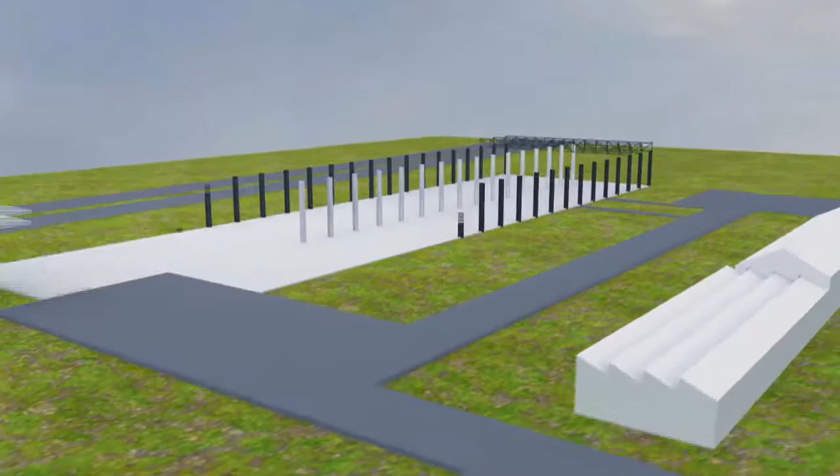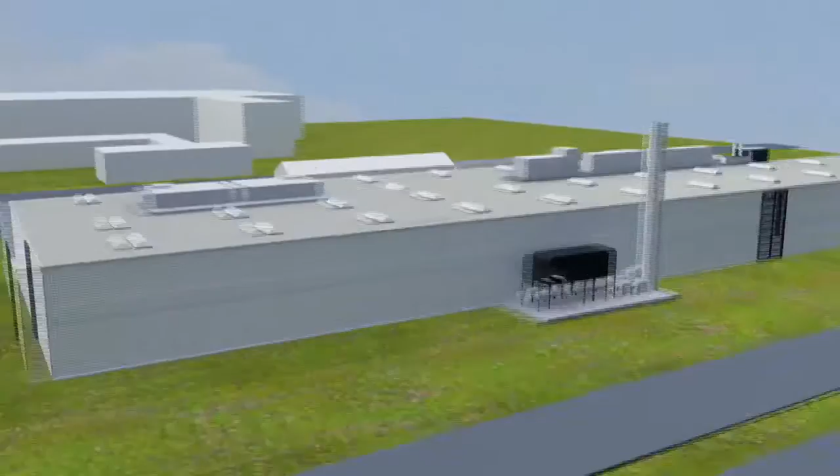SIA Abrasives has opened up its new manufacturing plant for coated abrasives at its headquarters in Frauenfeld. The plant was constructed according to strict ecological criteria. The new abrasives manufacturing plant will enable SIA Abrasives to improve its ability to deliver and increase its flexibility.

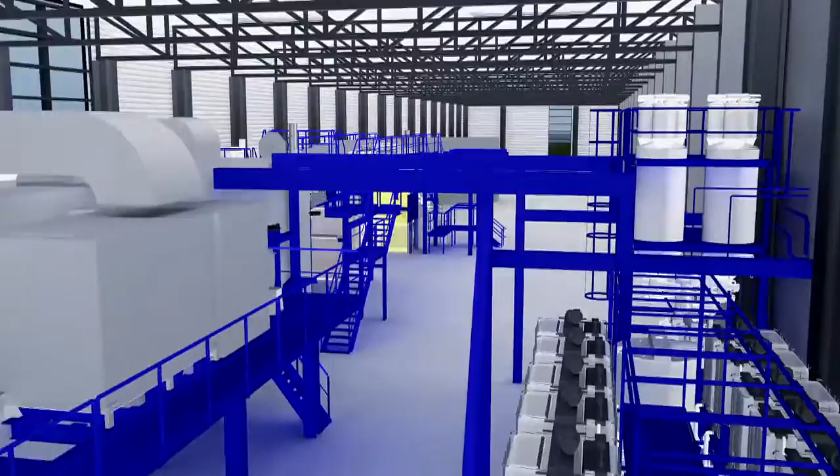More than 1,000 process parameters are incorporated and permanently regulated, which brings the quality to an extremely high level of consistency. It is now possible to manufacture all manners of different sanding products to meet individual requirements, using the latest technical means, depending on the abrasive requirement for a particular surface, such as material removal, finish, or structure.

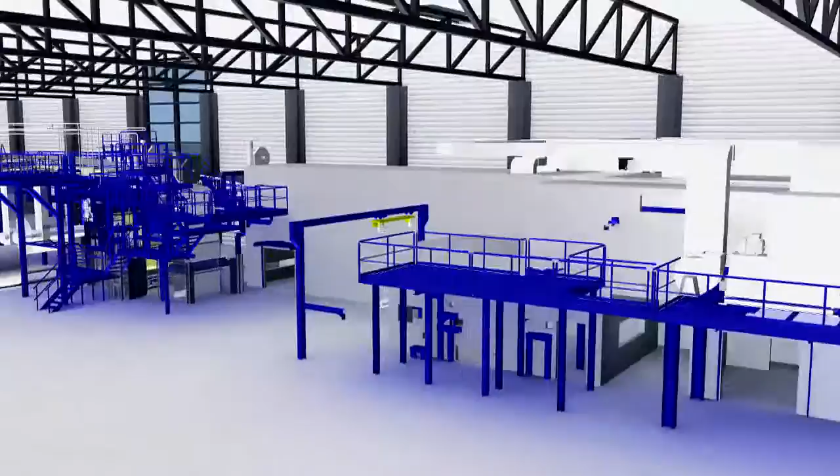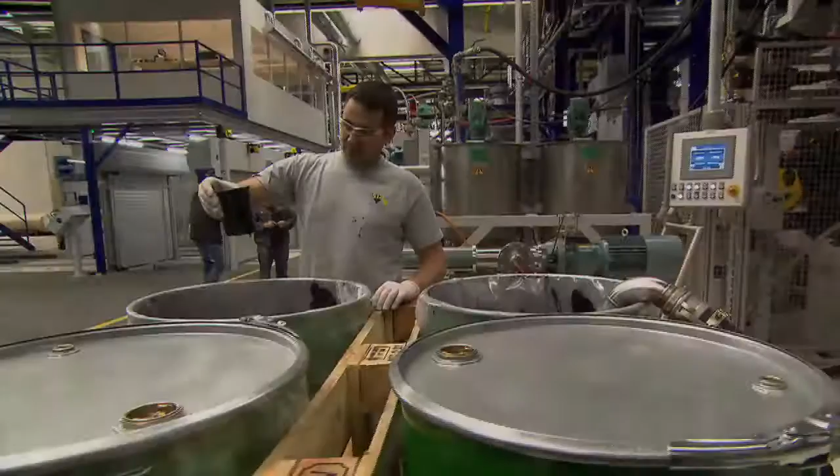Our careful choice of premium materials provides sanding products at the highest level.

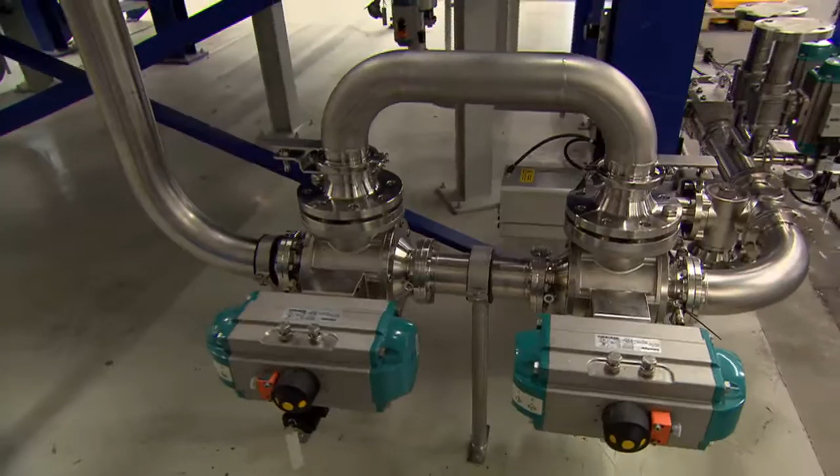Today, SIA Abrasives uses only water-based bonding systems. These are mainly made with phenolic and urea resins, with additives of different dispersions to gauge flexibility to suit the application. The system is fully automatic. The required bonding agent is prepared just in time in the amounts required for each production order, so no excess bonding agent is produced.

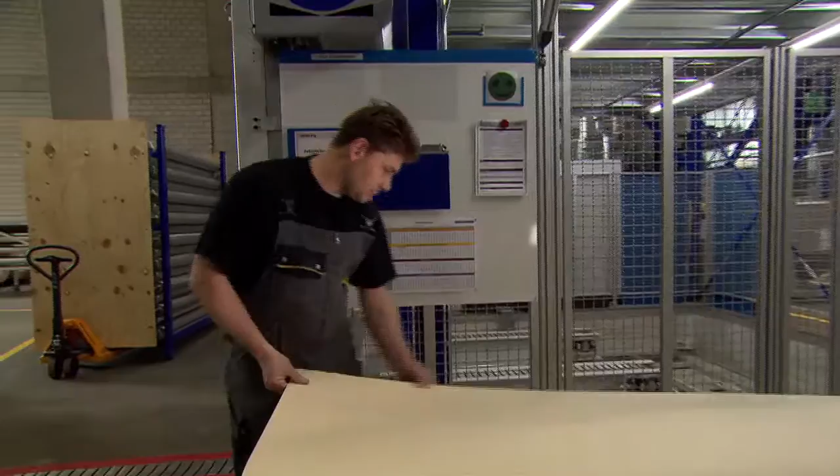Paper, cloth, plastic film, or combinations of paper and cloth are used as backings for coated abrasives. These backings give the abrasive very specific properties regarding grip and adhesion, stretch, tear resistance, flexibility, and stability.

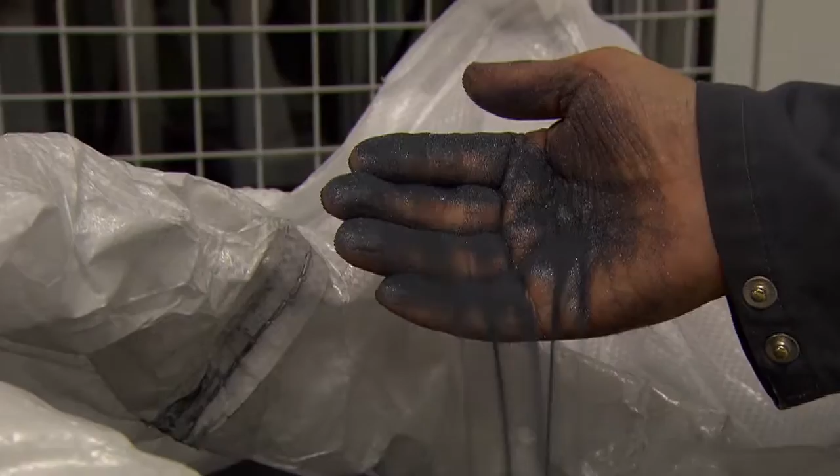The raw materials most commonly used today for abrasive grains are silicon carbide and aluminum oxide in a wide variety of forms. The hardness and toughness of the abrasive grains depend on the raw material used and determine the characteristics and application of the abrasives.

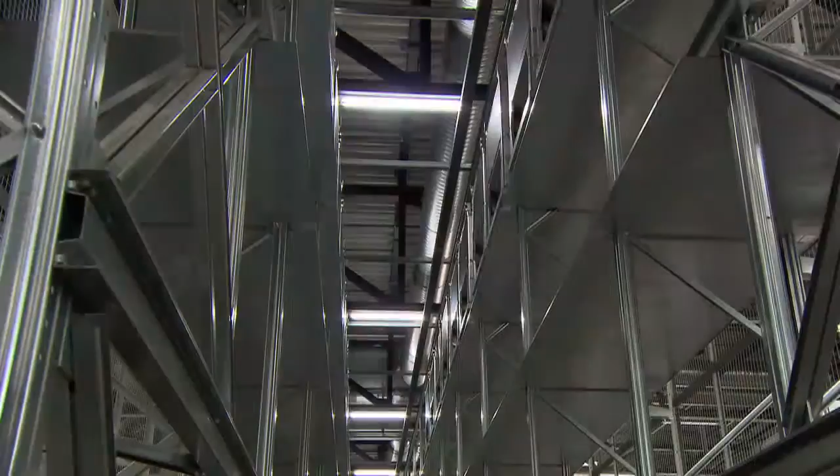The grains for abrasives production are stored in high bay racking. For accurate dosing of the abrasive grains, the abrasive minerals are first filled into a steel container from the big bags.

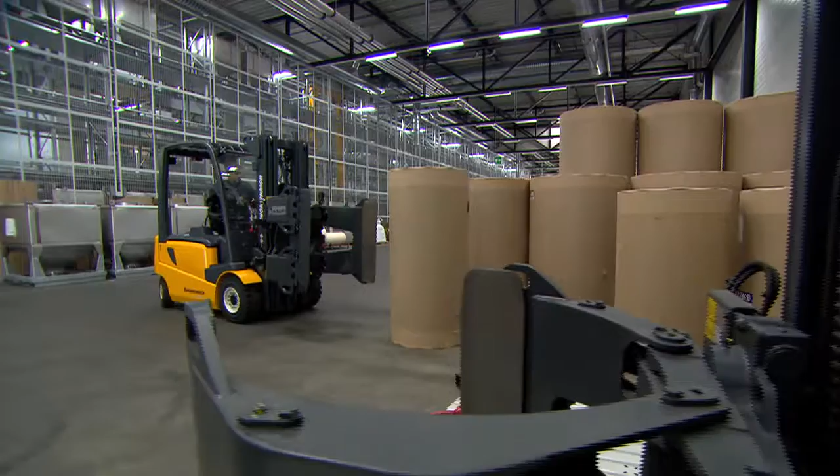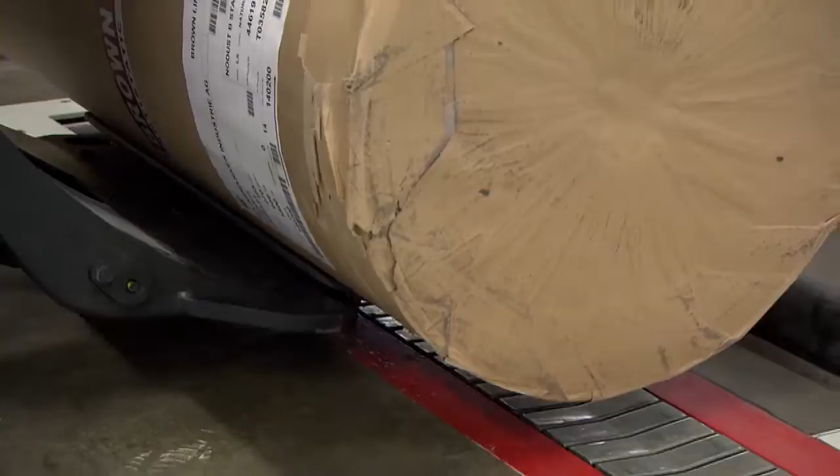At the start of the production process is the abrasive backing, which is supplied in so-called jumbo rolls with a width of up to 2 meters. Depending on the thickness of the backing, the supplied rolls comprise between 1,500 and 5,000 running meters, which can be processed to make abrasives.

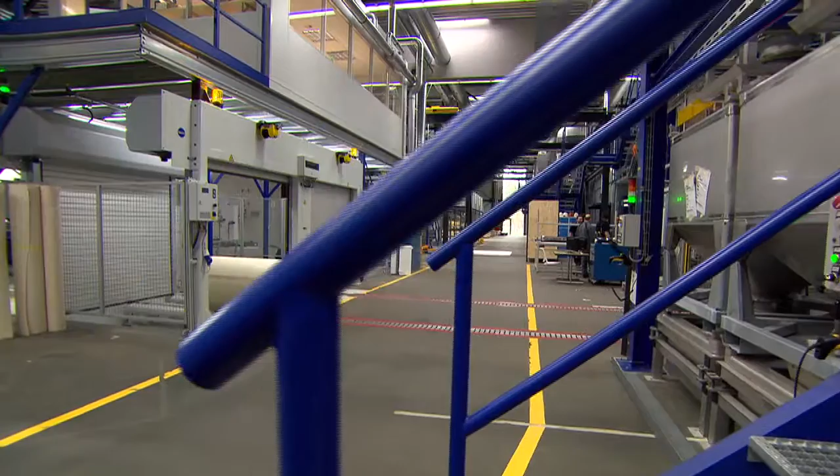Thanks to the double rolling, backings can be continuously fed without causing any interruptions to the production process.

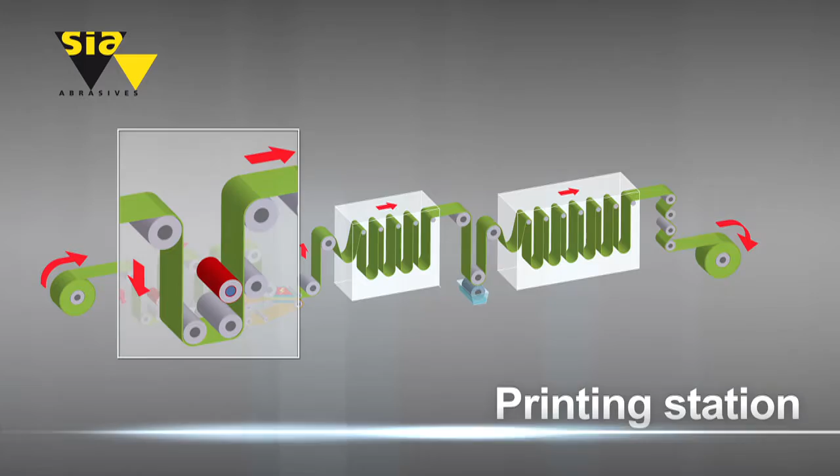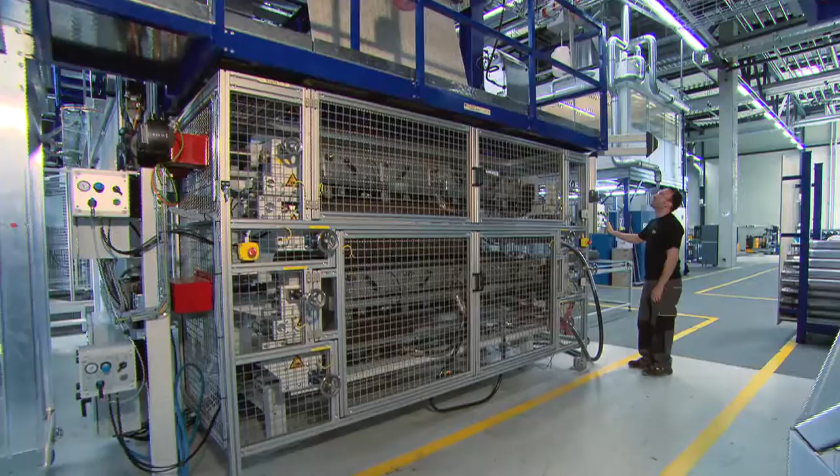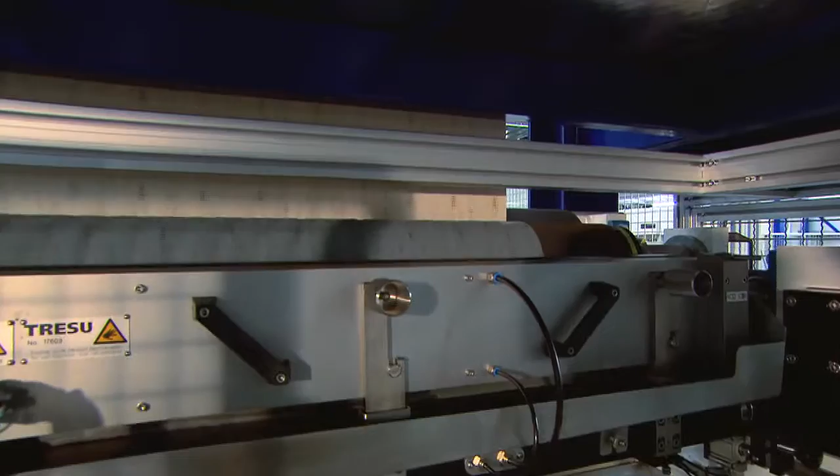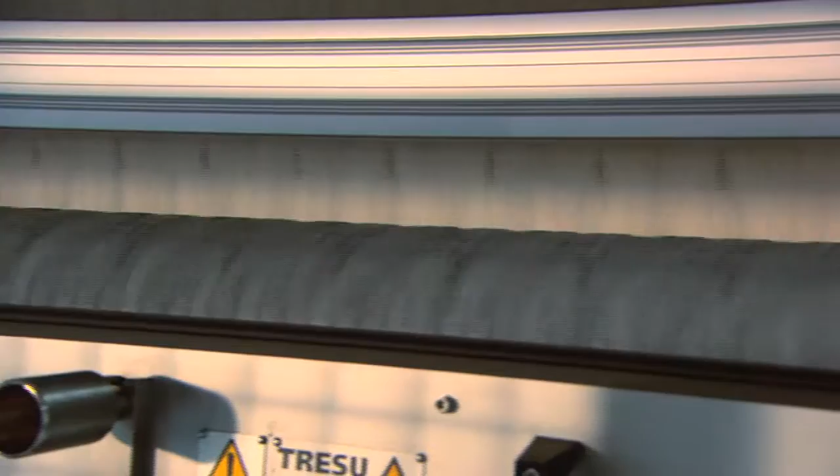The rubber printing blocks are prepared on sleeves to ensure that they can be changed quickly. Printing is carried out in flexo printing using rubber printing blocks. Printing on the reverse in flexo printing fulfills many criteria. The product designation, grit grade, and safety-related instructions are extremely important for the user. The serial numbers ensure traceability for quality checks and guarantees.

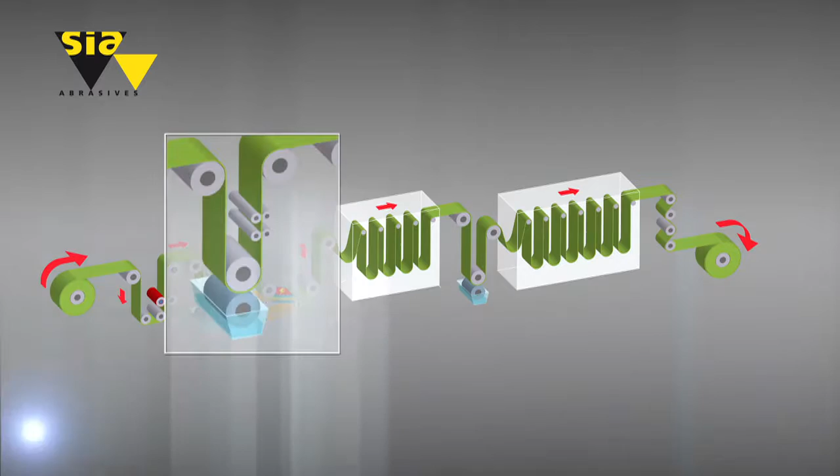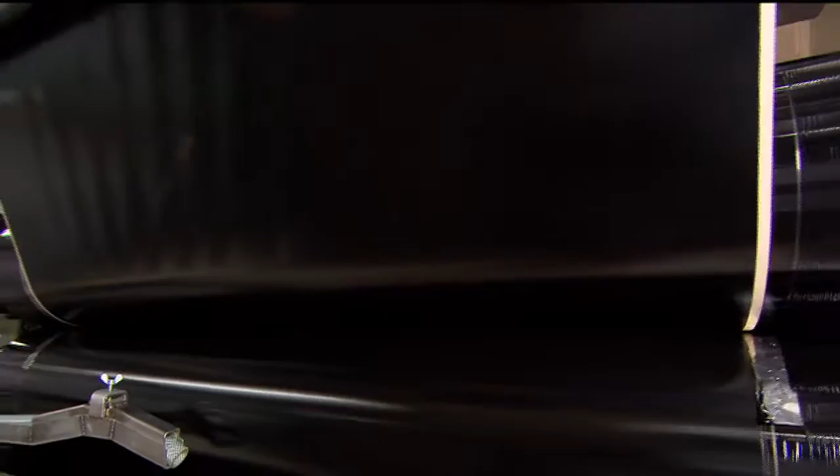The base coat fixes the grits provisionally in the right position to the backing. During automated operation, the binder resin is continuously dosed and applied to the front side.

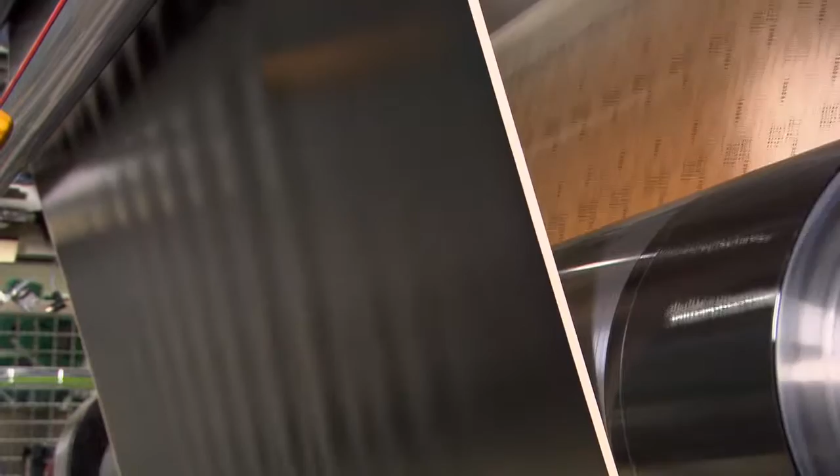Since the manufacturing speed of 80 meters per minute is very demanding, the entire process must be tailored to this speed. The feeding of the base coat is checked several times to ensure that the level of quality of the products is consistently high.

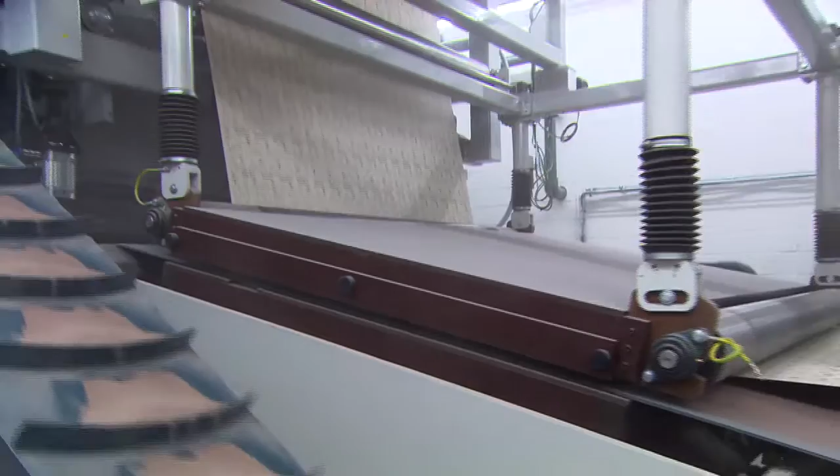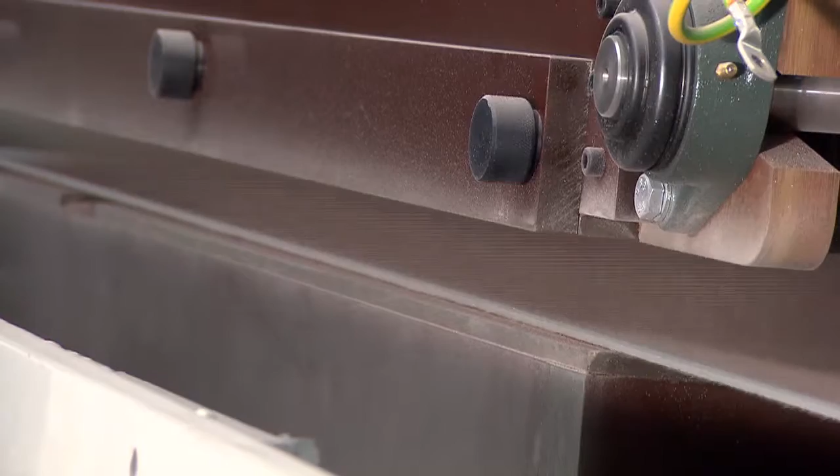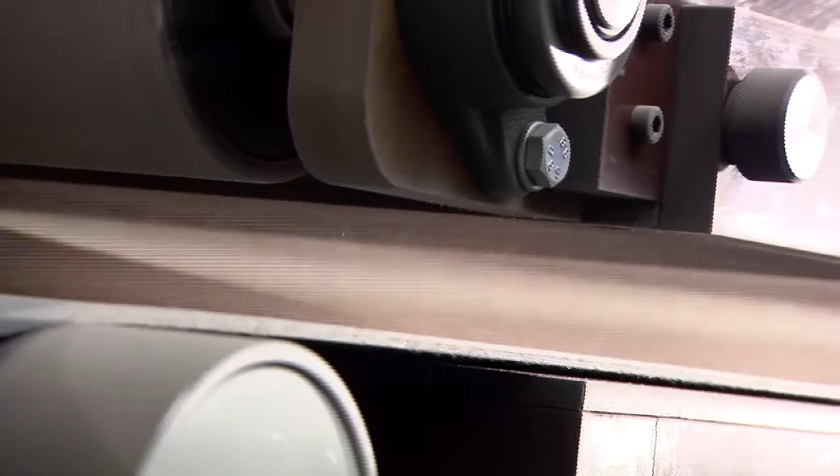The backing that has had a base coat applied now reaches the real heart of the abrasive manufacturing process, the electrostatic process. On a conveyor belt, the abrasive grain passes through an electric field. During the electrostatic charging at 90,000 volts, the abrasive grain is attracted to the backing, and the bonding agent acts as an adhesive.

In this fully air-conditioned room, temperature and moisture are monitored during continuous operation to ensure consistent climatic conditions.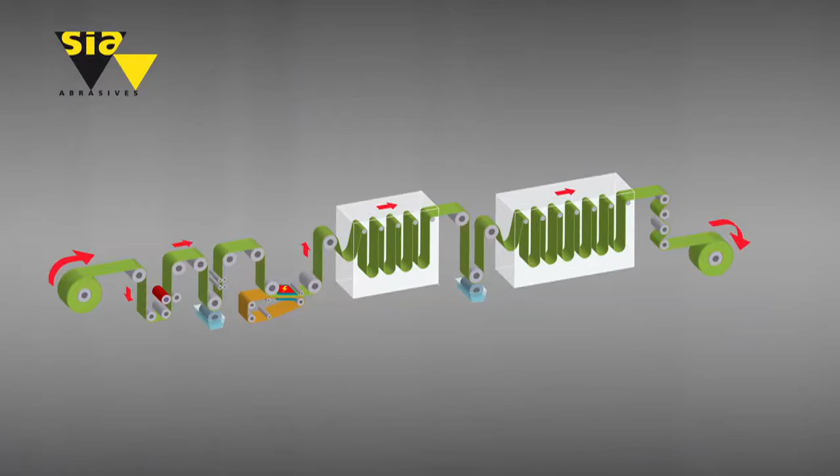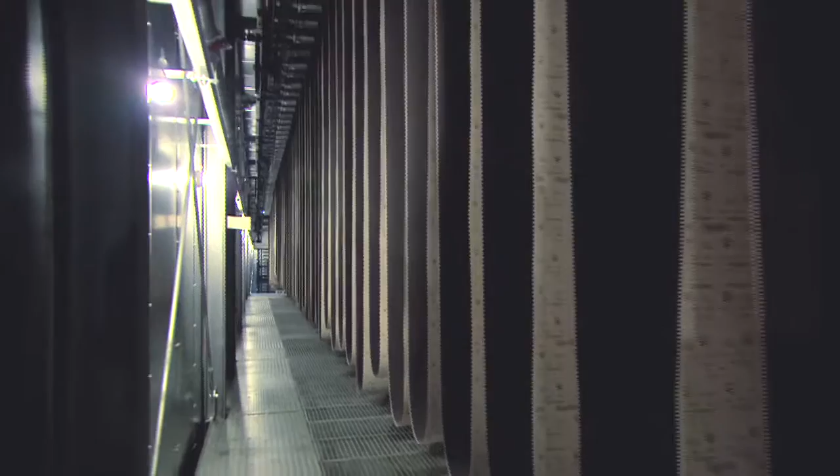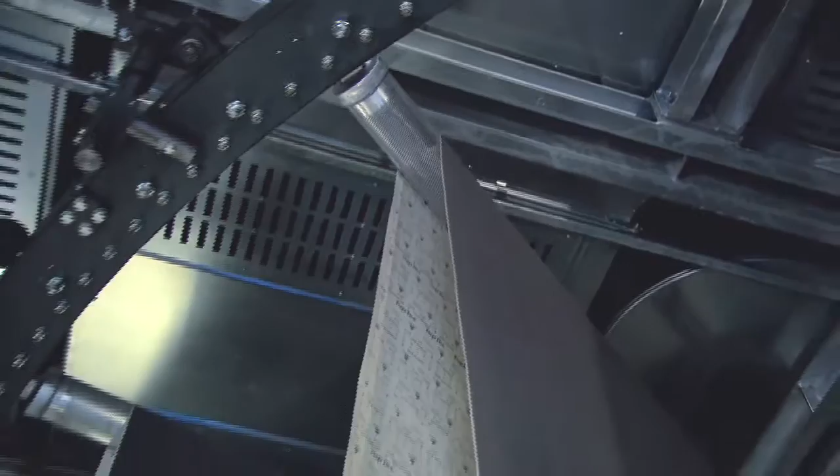In the first drying oven, the so-called drying chamber, the base coat is pre-dried. The abrasive grains are thus roughly fixed. Depending on the formula, the abrasive remains for approximately 90 minutes at a maximum of 150 degrees in the 100-meter long oven.

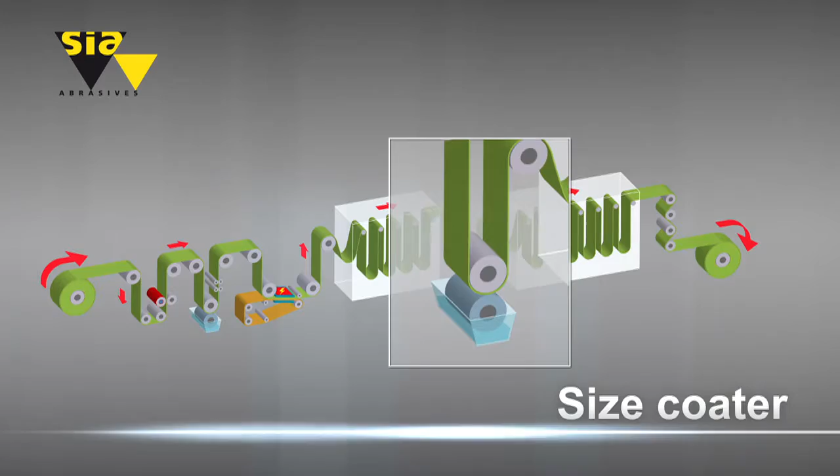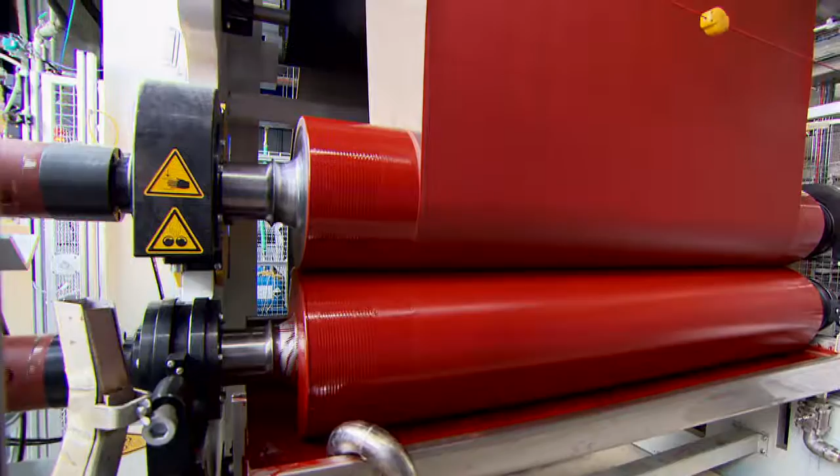The size coat is applied in the glue coating machine, and this coat finally fixes the abrasive grains to the backing. The binding of the abrasive grain contributes significantly to the quality of the abrasive. Depending on the product requirement, the abrasive may be painted in color in this process step in order to achieve better differentiation.

In the second drying oven, the abrasive is baked for approximately 120 minutes in the 185-meter long oven at a maximum of 135 degrees Celsius in order to achieve optimum hardening.

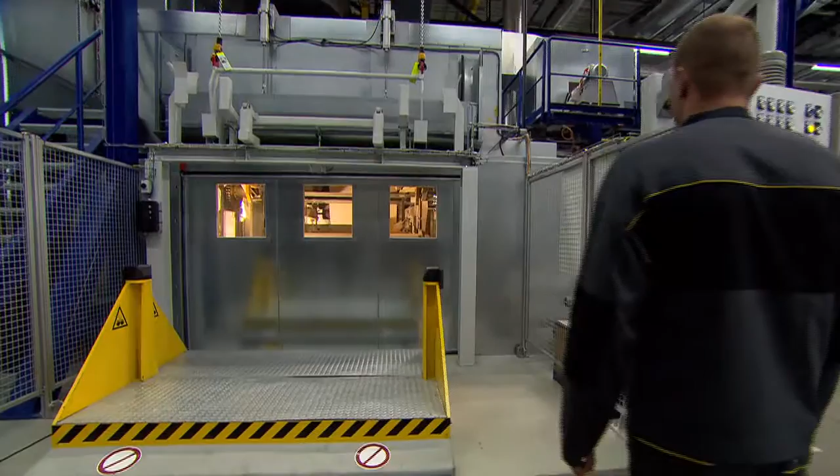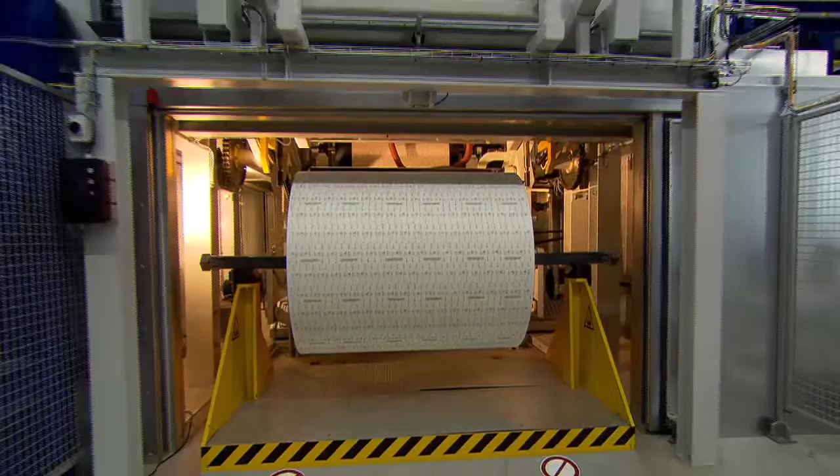The abrasive is now rolled up into jumbo rolls. The finished jumbo roll contains up to 3,000 running meters of abrasive, which hardens completely over several hours.

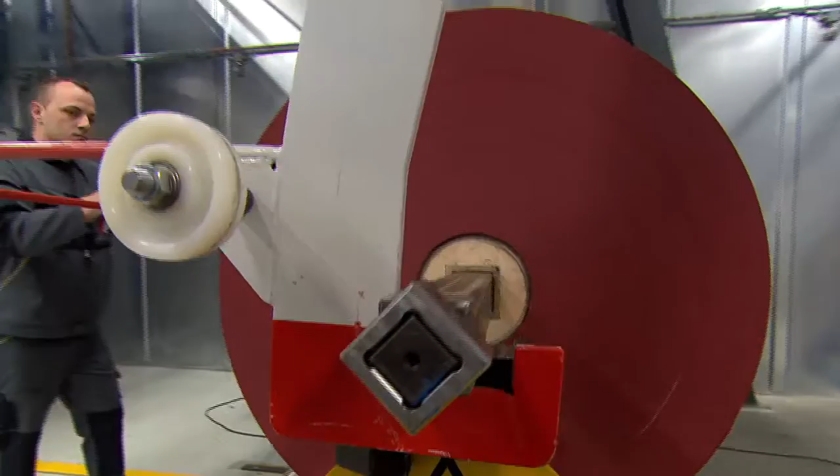The jumbo rolls now reach the post-processing stage. Here the abrasive is rolled out again and then broken, flexed, moistened, and cut.

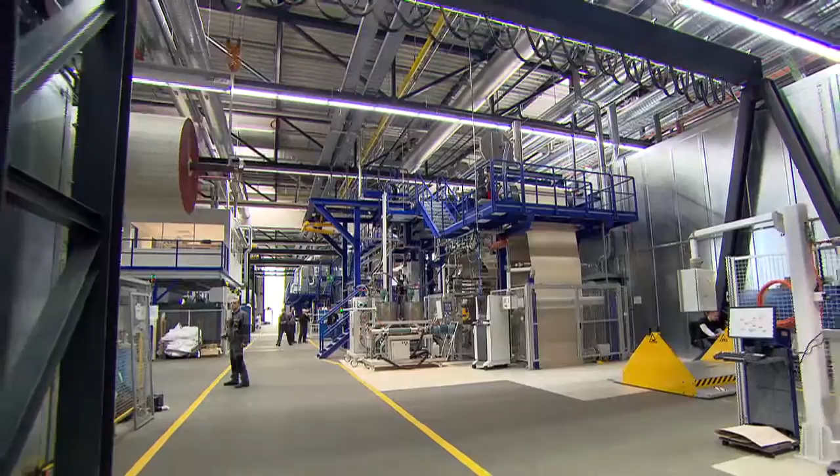The new factory is the most modern plant in the world for manufacturing abrasives. The annual output of the new manufacturing plant is the equivalent of a 1-meter wide sanding belt around the Earth. In total, capacity could also be doubled, thereby ensuring that increasing demand for our high-value abrasives can also be met in the future.